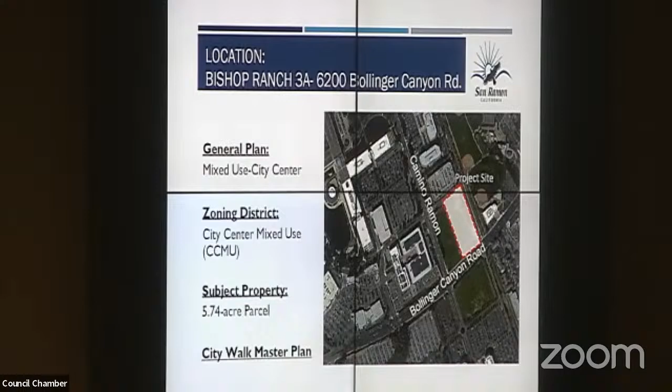So let's go ahead and get going here. The project is located on the Bishop Ranch 3A site at 6200 Bollinger Canyon Road. General plan designation is mixed use city center, zoning district is city center mixed use. It's 5.74 acres, and it was part of the City Walk master plan. As you recall, that's a much larger plan, about 135 acres in total, laying out different neighborhoods within the region. This project will take place in the 3A neighborhood, so you'll hear that reference from time to time.

In terms of history, this parcel goes back many years, but in recent history, the 2007 City Center Master Plan mixed use approvals were back in 2007, with a combination of retail and residential. That was replaced by the 2022 City Walk Master Plan. This particular 3A neighborhood was analyzed for 791 residential units on 3 parcels: the North Parkway Green, a small park space; a hotel already approved to the west of the project; and another area that is a future site for more additional housing.

Also in 2022 was the City of San Ramon Walking District Master Plan, which borders this project along Camino Ramon, and also the access along the Bishop Drive extension to the Iron Horse Trail. There was a prior concept review done in late 2023, in November, where we did some massing diagrams and talked a little bit about architecture and site plan. The project before you tonight is significantly similar to the concept review, just far more refined than what you saw then.

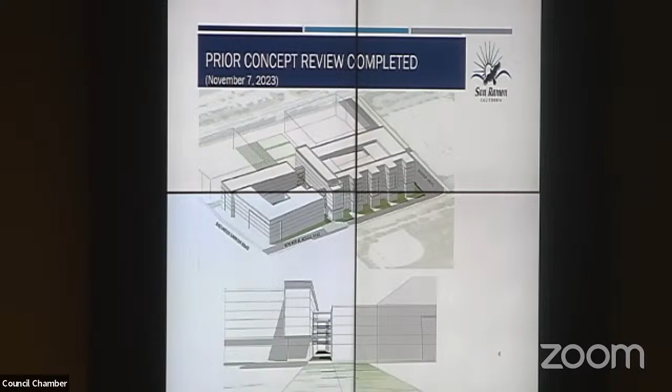Tonight's proposal is 457 apartment units within 2 buildings. The northern building is 7 stories, a wrap design with 11,400 square feet of leasing amenities and 640 parking stalls within the central parking structure. The southern building is 5 stories and includes a courtyard with a swimming pool. The breakdown of units are shown here; the majority are 1 and 2 bedroom units with some studios and 3-bedroom as well.

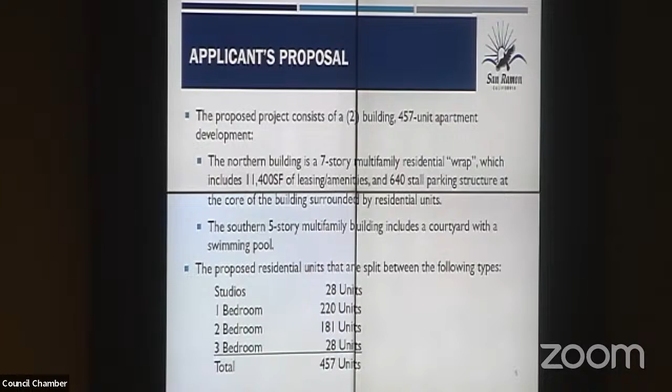So here's a site plan that shows the project in the context of Iron Horse Trail. Bollinger Canyon Road is to the right. The blue line is the Iron Horse Trail, and the red line is circulation to the trail. You can see the parking structure in the core area. The section below shows the relationship between the parking structure and the units, and then the pool, and then housing toward the Bollinger frontage.

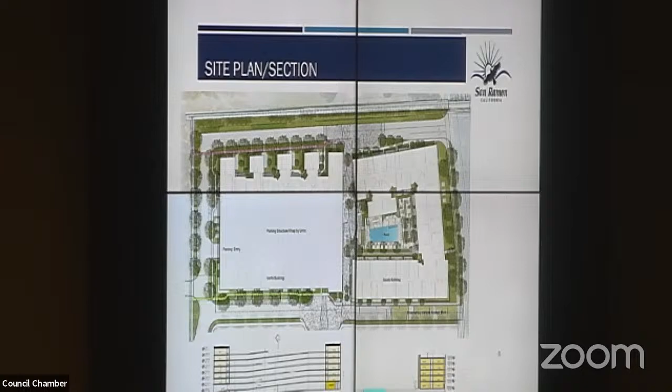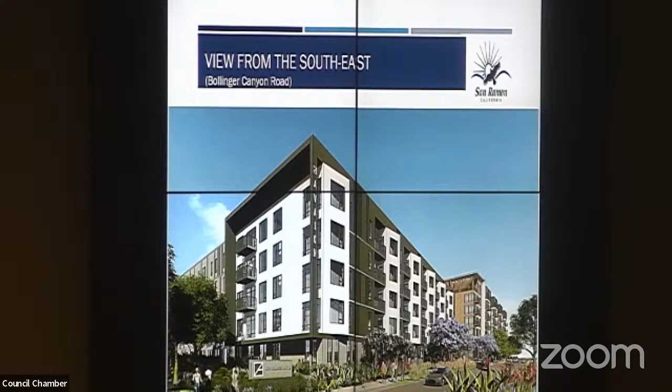So this is the revised renderings for the project. The project did go to the Architectural Review Board through a voluntary application, and there were some comments provided. Your staff report has the attachment of the response to comments based on the ARB recommendations, and the applicant will go into more detail on how they responded to those changes.

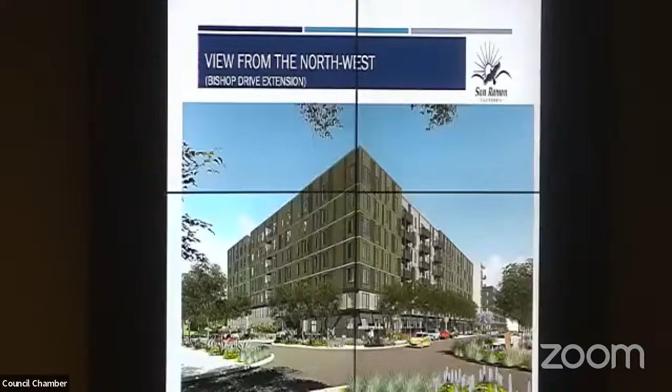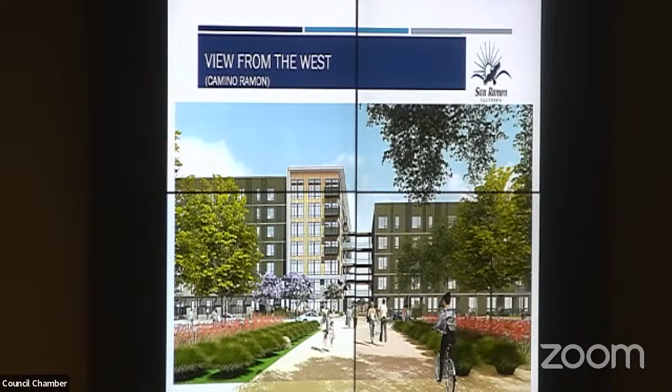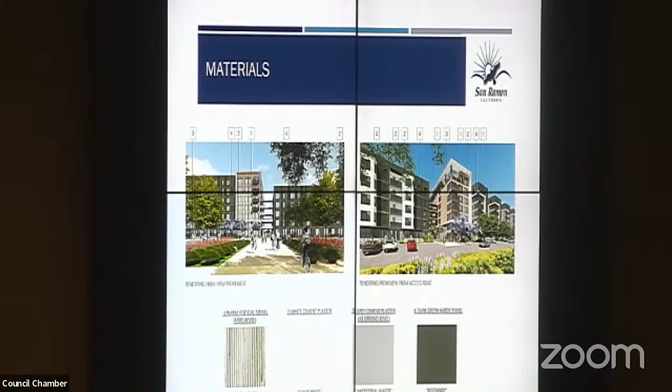In addition, the applicant has provided a supplemental parking study based on a program they've used in some other projects that shows an unbundled parking concept with 1.1 spaces per unit, where a total of 503 is required. The purpose of this study was to provide additional support that parking would work for this particular project.

The project currently provides 662 spaces, including the surface parking along the private streets. There's also a condition in the conditions of approval for a parking management plan, just to be clear on how that all will work, making sure we know where guest parking is and how people will come and go.

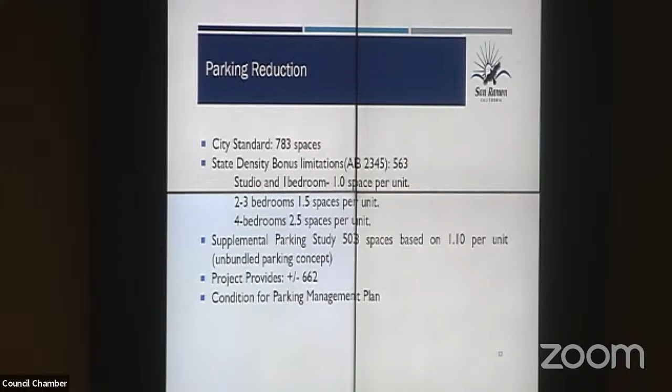In terms of the California Environmental Quality Act, there was an EIR done for the City Walk Master Plan that looked at the breakdown of units throughout the entire project. The 4,500 units for this particular area—there was this 791. This particular project results in 88 fewer units.

So as such, it doesn't result in any substantial changes beyond what was already analyzed in the prior EIR. The mitigation measures associated with both the City Walk EIR as well as the general plan EIR will be applicable as conditions of approval to this project. So it's covered under that prior EIR.

We provided a draft resolution for you. It has project-specific findings for the applications as well as CEQA conditions of approval. It has attachments of the mitigation monitoring and reporting programs for both the general plan and City Walk. We provided the outside agency comments for reference. We now also include housing no net loss tables as a reporting requirement to the state, to make sure we have reserves and don't get ourselves into a deficit.

I would also mention, I provided an errata sheet on the dais for you. There were a couple of revisions related to improper references to Bishop Ranch 1A versus 3A. Property owner references needed to be corrected, and then a few clarifications of conditions of approval just to help make sure it's clear as to what the requirements are. The assumption is that those red-line changes would be included into any recommendation tonight.

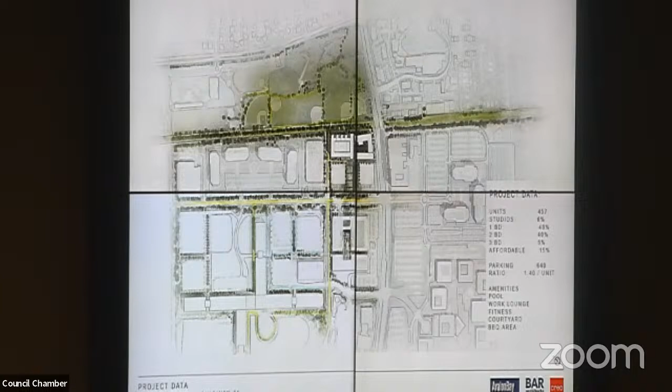While much of the project remains the same from the submittal at the beginning of the year, still, as Lauren mentioned, 457 units around 2 buildings. We've spent much of the last 3 months really working to respond to the comments we received both at our meeting in February and some comments we heard in November, as well as comments from the Architectural Review Board meeting, to think through how to best meet the neighborhood and the community. As a long-term owner, investor, and operator of our apartment homes, we wanted to make sure we got the design right, both for our residents and to greet the gateway at Bollinger.

We've spent the last couple months thinking through different tweaks, first starting small and then moving to a much grander change that we're really excited to present to you today. With that, I'll pass it off to Chris, who's going to talk through our changes and look forward to discussing the project this evening.

Good evening, commissioners. My name is Chris Hagelin. I'm with BAR Architects. I'm really excited to be here and see all of you again. BAR has been involved out at Bishop Ranch for many years on City Center and had the pleasure of working with Sunset on the City Walk Master Plan. It's nice to be involved in one of the first vertical buildings, and thank you for taking the time tonight.

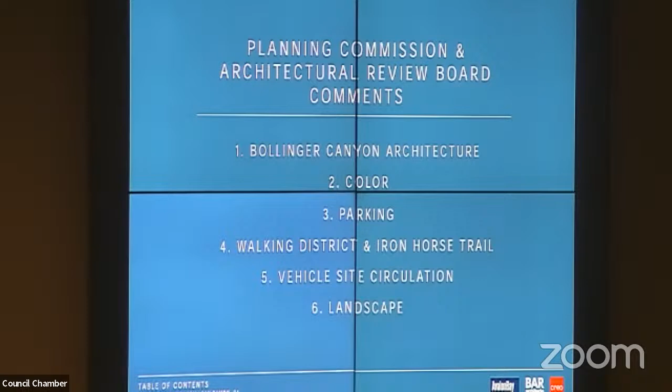Those issues are: the Bollinger Canyon architecture, second is the building color, third is parking, the next issue is the walking district and the Iron Horse Trail, 5th is vehicle site circulation, and the last issue is landscape.

So the first issue, Bollinger Canyon architecture. This is a quote from the Architectural Review Board: on the southeast corner of the 5-story building fronting Bollinger Canyon Road, consider breaking the upper floor's corner element to create additional articulation that would draw similarities with the 7-story building. So this is the corner as you come in off Bollinger Canyon Road into the project, really the corner we consider the front door.

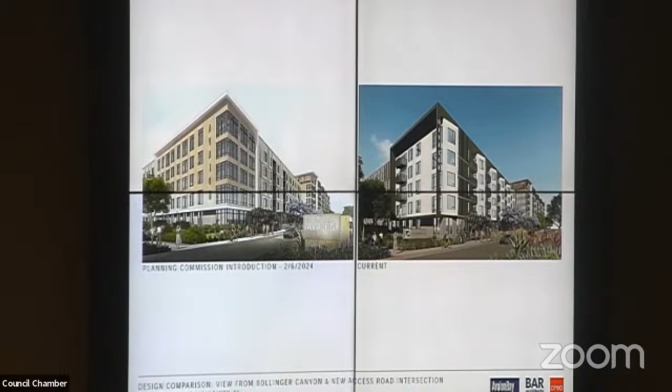In each of these slides, you'll generally see a before and after. On the left-hand side is the previous submittal to the planning commission back in February, also the same image for the Architectural Review Board, and on the right is our proposed revised solution. So this corner, we agree, is very important.

We tried to distill the Architectural Review Board's comments, which were sometimes conflicting and somewhat subjective, but also incorporated BAR's thoughts, interacting very closely with Nora and the team at Avalon and Sunset as well. We agree it's an important corner, so the changes we've made, we think, have improved the project.

We've taken away what had been a brown element with a white frame—there were also discussions about color—and introduced this white element. We've got a green bar running along the eastern side of the building with white bays at a slight angle that interact with a recessed deck. We think it gives a very nice cadence, and we like the contrast between the white and green that creates a lot of pop and interest at this corner and more movement.

It ties with the building as you move further north. There's a series of what I've called fingers in the past—these vertical elements—and this is kind of a smaller version of that. It also gives an area for Avalon to have signage, and overall, we think it presents a nicer front door to the project.

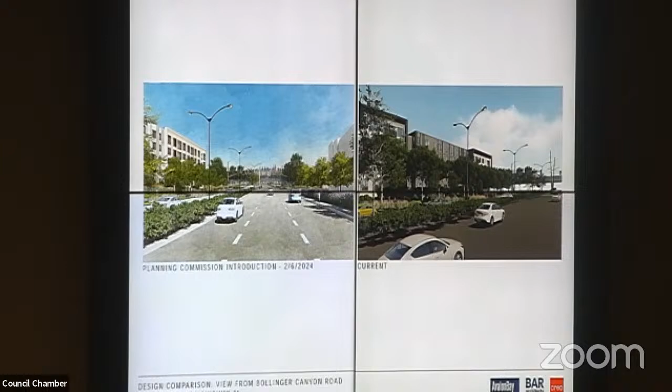Along Bollinger, now back a little bit, an image on the left shows that same corner further away, and the new image on the right. That green bar we were looking at is the one on the right with the white. There's a complementary version on the left-hand side along the EVA that has the same white and a single bay, and then it gets simpler—the white bays do not repeat as it moves along that western face.

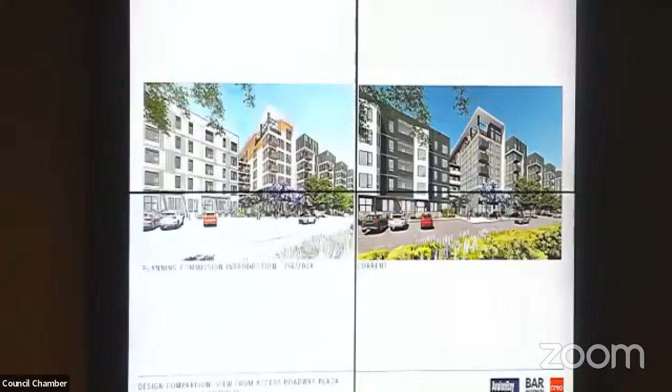Color. So there was a lot of discussion about color amongst the team. This is, again, a quote from the Architectural Review Board: the color scheme reads a bit flat due to too much of the green color palette. Consider adding another lighter color that offsets the brown colored tile, since the plans do not show much difference between the green colors.

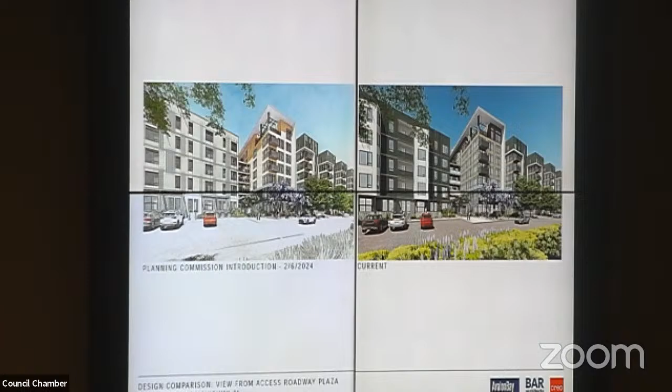So on the left-hand side is the previous submission, right-hand side is the new. This is along the eastern face of the building at our main drop-off and midway down the course of the project. On the left, you can see we had a lighter, very pale green together with this darker green and the white and brown accents. And now you can see the new...

proposed rendering. On the left-hand side, you see those white cranked bays that we saw previously moving down towards this main entry piece. The areas to the right are really unchanged, although we have darkened the darker green a little bit. We just think it creates a better contrast to the white and the wood, faux wood element, brown element.

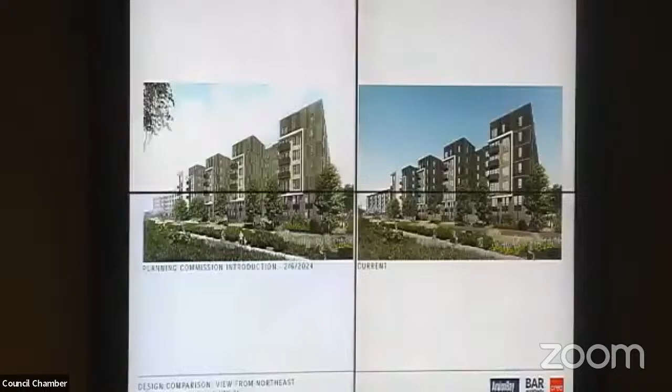Still talking about color, moving further along the east-hand side on the north side. Again, on the left-hand side, a previous submittal, on the right, the new submittal. Really not much change here, just darkening that green a little bit. You can see on the far left-hand side that entry piece where we started on Bollinger. Again, we think that darker green creates a really nice contrast with the white frame. And then the base is a lighter gray, whereas previously had been a little bit darker.

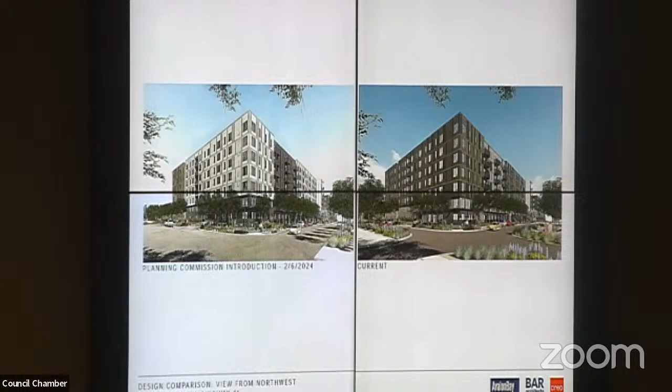And then the final image, this is the corner looking from the northwest. Again, the image on the left was the previous, a little bit more washed out, lighter green. Here the new image has the darker green and the lighter gray base. And way off in the distance, you can see the building as it moves towards Bollinger Canyon.

So here's the color board with the two new images. The color palette and the materials are fairly simple. The green element you're seeing is a cementitious board, sometimes called a Hardie panel. That's a manufacturer, so it's a board that is screwed into place and painted. The light gray and the white are both cement plaster. And then the wood, kind of quote unquote wood, we want something that looks like wood.

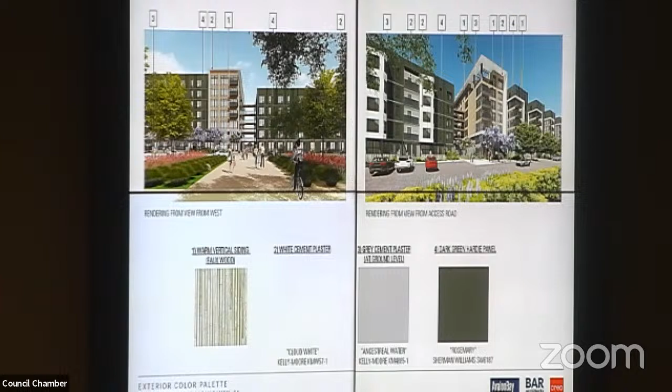We don't want to use wood. Wood doesn't perform very well. It starts to not look good pretty quickly, especially in the hot climate here. So there's several products that make a simulated wood that we think look quite nice. We haven't quite settled on what that product is, but it'll give the appearance of a series of vertical wood slats.

Parking, as Lauren mentioned, there's been some discussion about parking. This chart hopefully shows it in a simple graphic way. On the left-hand side are your San Ramon standards, which for a project of this size would call for 781 total spaces. The next bar over is state law. So through the state density bonus law, the state has set requirements for different unit sizes.

The next bar over, the lowest one, is based on working with Gibson Transportation Consultant. They did a review of various projects in the East Bay that were felt to be similar, and they came up with a demand of 502 total spaces, 1.1 spaces per unit.

And then on the right is where we currently are. I think the team felt that the Gibson study was probably a little bit too low for this specific site. We felt like having more than that would be good. So we are proposing 662 total spaces. 22 of those are street spaces on our property, and 640 are in a single garage. So higher than the parking study, higher than state law, not quite as high as your guidelines, but approximately 1.45 spaces per unit.

So this is on the north-hand side of the site. Our building sits out on the right, and then there's an existing parking garage to the left. You can see our new proposed connection coming from City Center, heading south to the west, coming up to Iron Horse Trail.

In section, hopefully this is legible in your package, the bottom section is straight out of your walking district plan. It calls for this particular area to have approximately 35 feet of total landscape and trail area, with the trail itself, the sidewalk, being 8 to 12 feet wide.

Above is our proposed section. On the right-hand side you can see our new building, the Bishop Drive extension, and on the left-hand side is our walking corridor. Hopefully you can read the numbers - we are showing something that's 35 feet wide.

The trail itself, or the walkway, is 10 feet with a 2-foot shoulder in decomposed granite on either side, so the total width is really 14 feet - plenty of room for pedestrians and bicycles to pass each other. To the left is the existing parking garage, with more landscaping. We're not really in control of what happens in that parking garage.

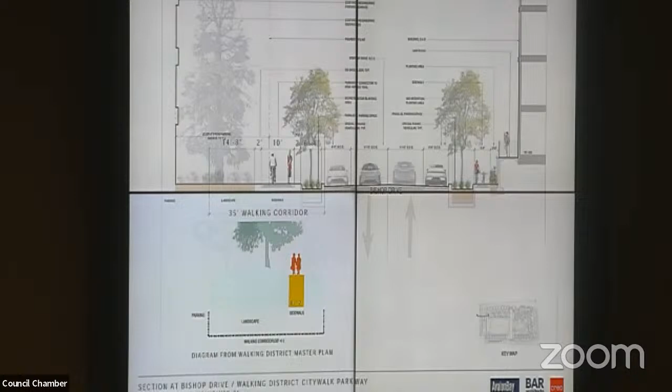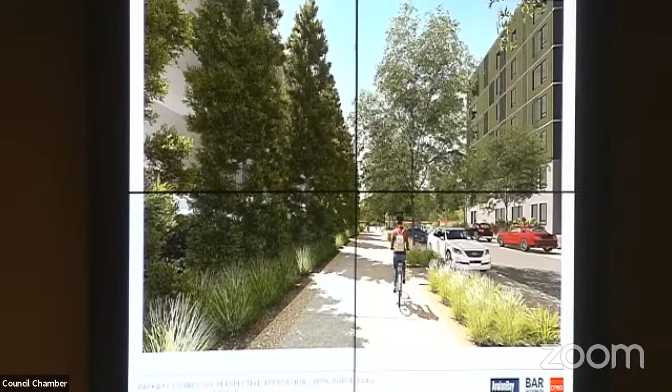Here you can see a rendering, looking from City Center to the east towards the Iron Horse Trail and the park. You can see our new proposed building on the right, the Bishop extension, and some existing trees on the left, and you can kind of see grade out the parking garage. But really nice wide path, new landscaping, as well as supplementing some of the existing trees.

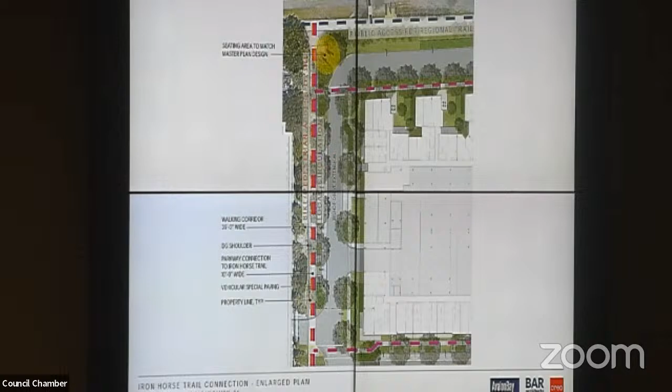Another area was the connection between our new trail and the Iron Horse Trail. The Iron Horse Trail is the blue dashed line at the top of the page, and what we're proposing is a seating area where these two trails connect.

There was a question about how the new bridge being built interacts with our project along the east edge. I've got two sections for you. One section, maybe a little hard to see on the graphic, is fairly close to Bollinger Canyon Road, about a quarter of the way down our eastern street.

On the left-hand side, you see our new proposed building. On the right-hand side, you see Iron Horse Trail. The trail and the bridge are coming from an elevated portion over Bollinger, and it starts to drop down really gradually as it meets grade.

In this area where we're showing it maybe halfway up, on our property there's our access road, about a 10-foot landscape area that's on Avalon's property, and then another 10 or 12 feet of landscape area that's part of the county/city property. Then there'll be a retaining wall - that's part of the construction of the bridge that we're not involved in.

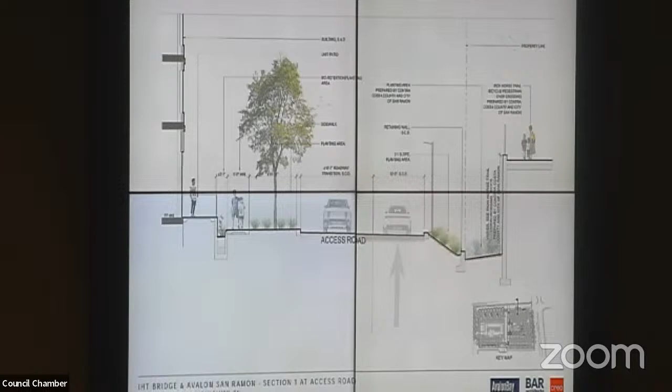So you can kind of get a sense of people walking there up above. There's quite a lot of distance between the bridge and the building, and something that we feel is going to be a nice relationship between the trail, the bridge, and the building.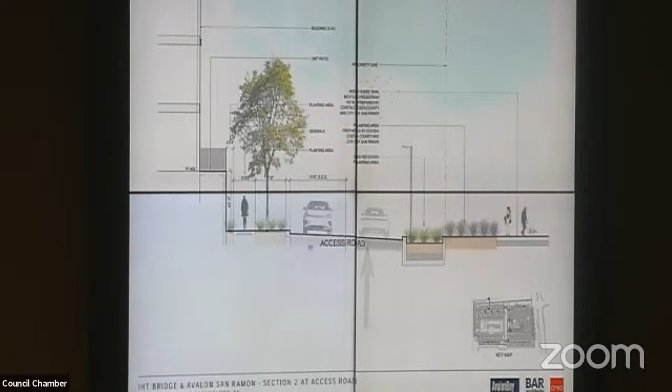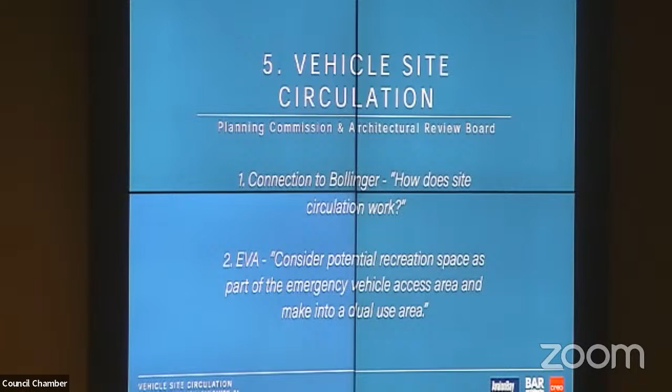Vehicle site circulation, the connection to Bollinger - how does the site circulation work? Second point, the EVA, the Emergency Vehicle Access - consider potential recreation spaces as part of the Emergency Vehicle Access area and make it into a dual-use area.

So here's our site plan, addressing the question about the connection to Bollinger, point 1, and the EVA, point 2. Here's that connection to Bollinger - the upper sketch is a very early sketch of our understanding of how that connection would work.

Originally we thought there would be a single lane coming in, a single lane going out to hit Bollinger. There's an existing signalized intersection there that light will be expanded upon - right now the light doesn't serve people coming out of this because there's nowhere to come out of. Below is the new plan - working with the civil engineer and traffic engineer, another lane has been added, so there's now 1 lane dedicated to come into the project and 2 lanes dedicated to leave.

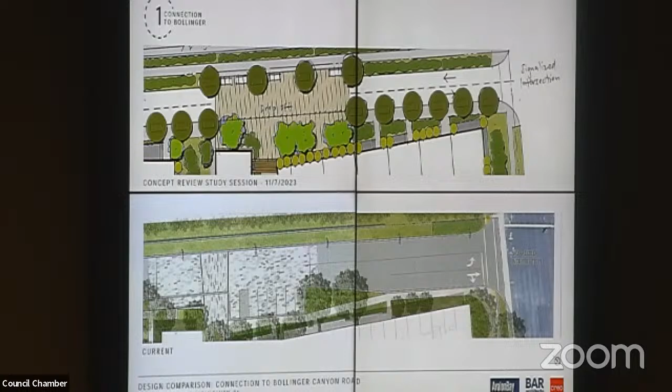One lane in the middle will be left-turn only, and the lane closest to the bottom of the page will allow you to go straight across or turn right. Not a major change, but addressing the anticipated traffic on the site.

The next comment is about the EVA space. This is the space to the west of our building, between our project and the future building to the west. For our purposes, this is only for emergency vehicles, and it would have some sort of bollards or be blocked off on the left-hand side.

The upper slide is what we had proposed before. The lower slide is not radically different, but what we're proposing is more of a turf block where grass comes through a turf that the fire department can drive over, giving it a nicer green feel.

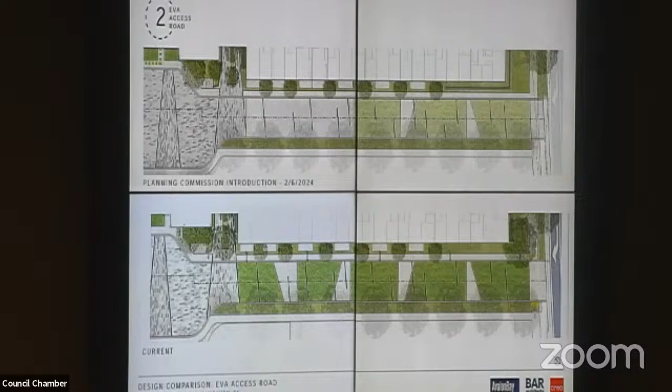And I'm going to turn it over to Todd from Creo to talk about a couple of landscape items.

Thank you all, good evening. I'm Todd with Creo Landscape Architecture, and I'm the principal in charge on this project.

As Chris and Nora have mentioned, we've been working very closely with the city ARB as well as the Planning Commission, and also our partners at Sunset, to develop a landscape plan that I think is appropriate for the climate and also creates a walkable, enjoyable community.

I'll talk a little bit about the specifics of the planting here, but what we have up on the screen right now is essentially two different comments that we received from the ARB and that we have addressed.

They're fairly minor comments. Comment number one is to consider more vertical, columnar tree species adjacent to the building. And so we've done that — I'll show you in the plan here in a minute.

The second comment is to consider the planting location of Arbutus marina trees, because they can litter the ground with droppings. So we've done that as well. Again, fairly minor comments.

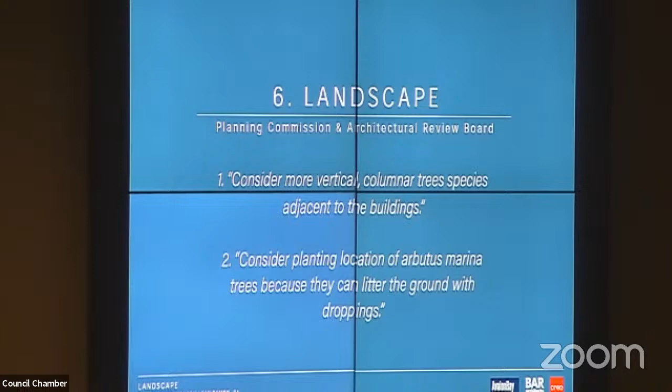So here's our landscape plan, which Chris has already addressed a bit, but I'll take a step back and talk about our concept. In working with BAR, they have a concept that, of course, aligns with the architectural design, and our concept jives with that.

In particular, the landscape concept is derived from the California seismic activity — the fractures and the idea of fracturing the landscape. That's why you see in the paving patterns some lines sort of jutting through the site.

And the paving patterns and the actual pool have sort of an angular shape. So those lines project through at the ground plane to kind of break up the landscape and create interest.

You also see that at the EVA access where the lawn is — there's a mixture of lawn as well as paving that break up the space. So that's sort of what you see in terms of the forms of the landscape.

As it relates to the planting along Bollinger Canyon Road, we have sycamore trees — large, 35-foot diameter shade trees, pretty standard. Then as you enter into the site... sorry, I do need to check some notes here because there's a lot of plants.

Along the access road on the top portion of the page, we have evergreen elms. Those are going to be about 25 to 30 feet in diameter.

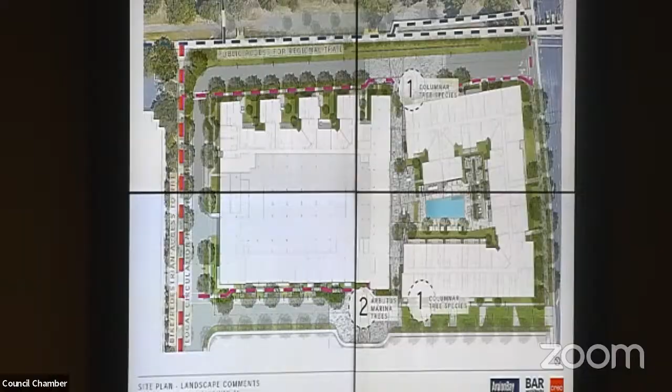Great. And I just want to review, for the sake of the public record, the question I had previously was about the EVA road, and what impact it might have when there are future developments to the west, to that road and how it connects in. If you could just briefly comment on how that might play into the rest of developing the BR-3A parcel.

Okay, so emergency vehicle access is for fire trucks and emergency vehicles only. There's a limited access off of Bollinger. Right now it would be blocked off to regular traffic. Let me see if I can find a better diagram. I'm going to go to my presentation because I know where that is.

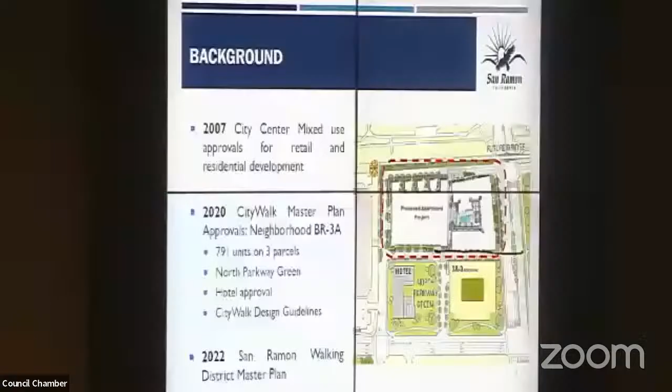So if you look at the neighborhood diagram here, the EVA is right here, and the hotel exists here. There's a turnaround right here now. This road does not exist currently, but it would be necessary as an access point, because when the next phase of residential, this 3A3, comes in, you're not going to have an access point off of Bollinger Canyon Road. So we're going to need to look at how one gets into that structure, whether it's in and out from this access road, or whether it's a loop system there. The final geometry will depend on the actual proposal for units on that 3A3 parcel.

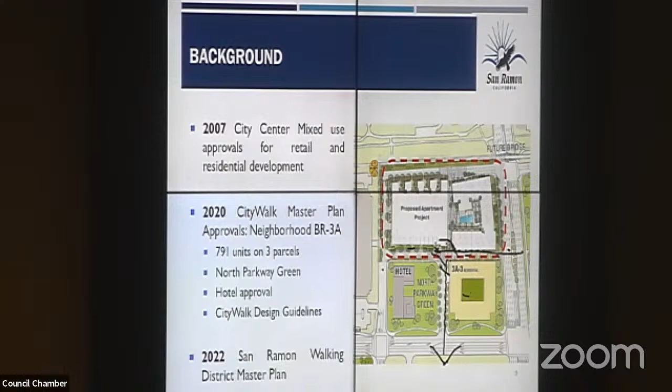The EVA will actually be able to service both properties as well as the hotel to a point. It just allows access for emergency vehicles into the core of the 3A neighborhood as a whole. And will that be something that, as the project develops, they are aware the EVA road may become multi-purpose or multi-user as opposed to exclusively on this parcel?

Well, it's not multi-user, it's only used by emergency vehicles, and that'll be a requirement for that. Whether or not it also meets the requirements of emergency access to the 3A3 parcel, yes it would. The fire district isn't particularly concerned about who owns what piece, they want access and quick access. But that doesn't require us to state something at this time that might be a future requirement.

The EVA is going to be there, and in order for this, either the property is going to develop with their own emergency access, or they will take advantage of an existing EVA through an agreement. We have the luxury of having Bishop Ranch as the master builder of all this, and they have CC&Rs and design control, so they're going to want it to be as efficient as possible and not have multiple EVAs when one can do the job for two properties.

Okay, well, thank you. I just was worried about future use, and not twisting us into a situation we couldn't get ourselves out of as the city. Okay, thank you. All right, anything else, gentlemen? Okay, thank you so much.